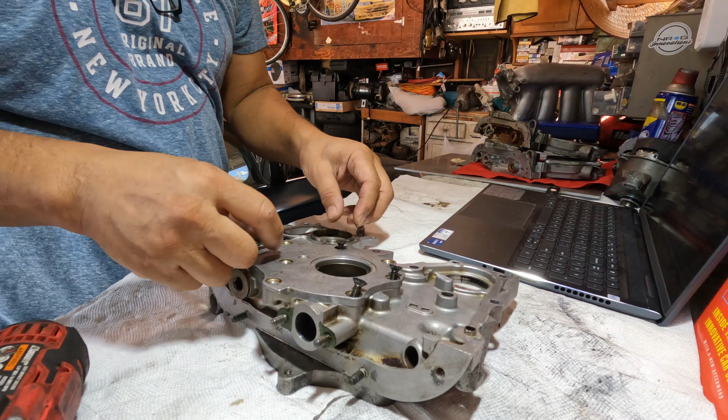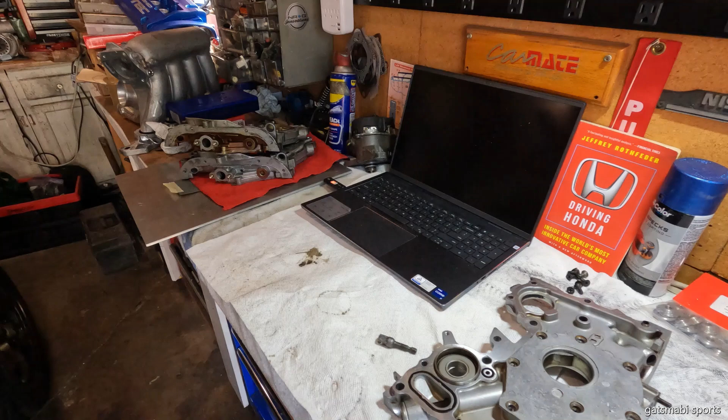I got the oil pump here that I am going to show you how to do the inspection. I have shown you how to build a stroker, or more like an H23, and I failed to show you the most important thing to check, which is the oil pump. This is more like the heart of the system.

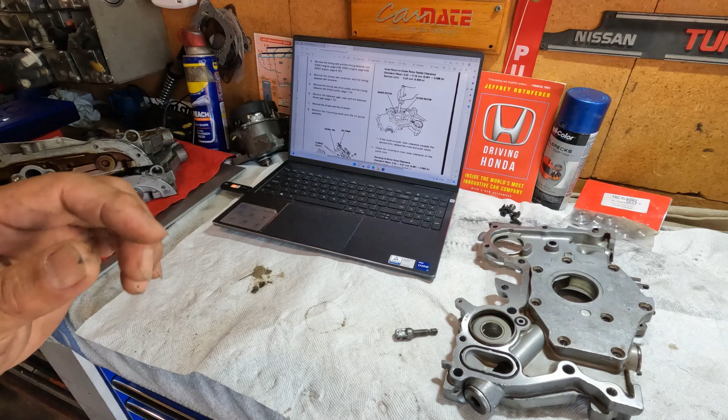Without taking the time to just remove the screws and recheck the oil pump, the gearing and all that, all of the hard work that I did on that motor will be a waste. I have worked on this motor for quite a long time, and I built a lot, and so far I have not run across an OEM oil pump that failed.

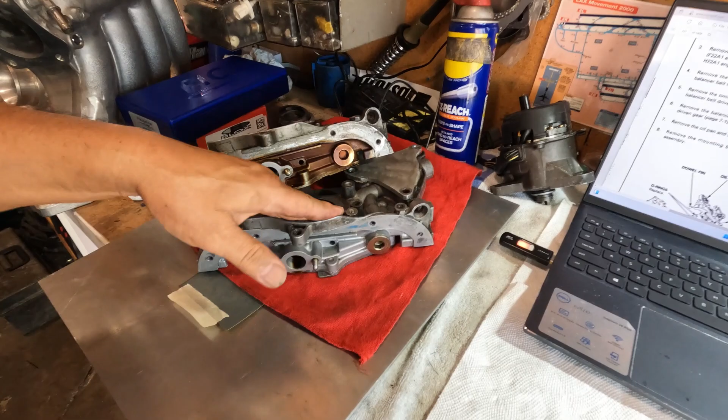This one in particular is for H22, and I have two sets here for F23, which is basically just about the same. This is the one where I deleted the balance shaft. Since I have an H22 oil pump here and I have the service manual for it, I am simply going to follow the Honda guidelines for the Prelude.

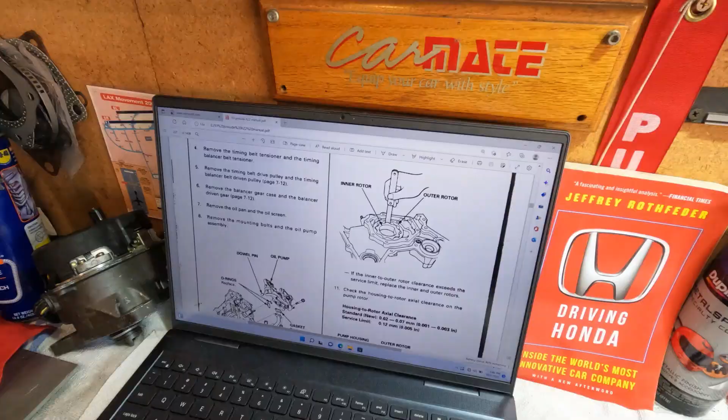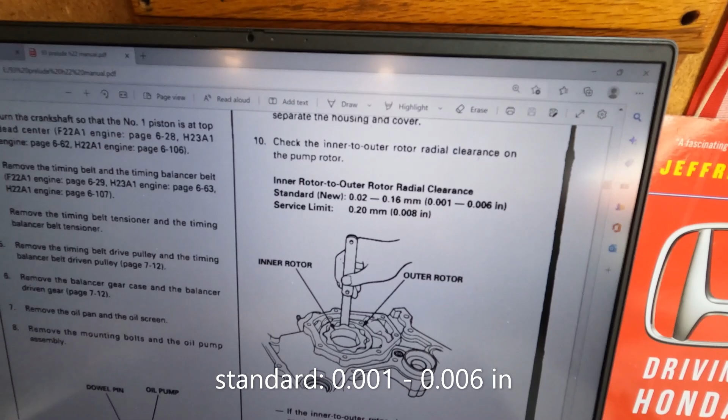So first thing we're gonna check is inner rotor to outer rotor radial clearance, right there. It shows from 1 to 6 thousandths standard. Okay, 2 thousandths. Right there. 2 thousandths barely goes in there. But it's good as long as we're not getting like 6 thousandths on there. And next

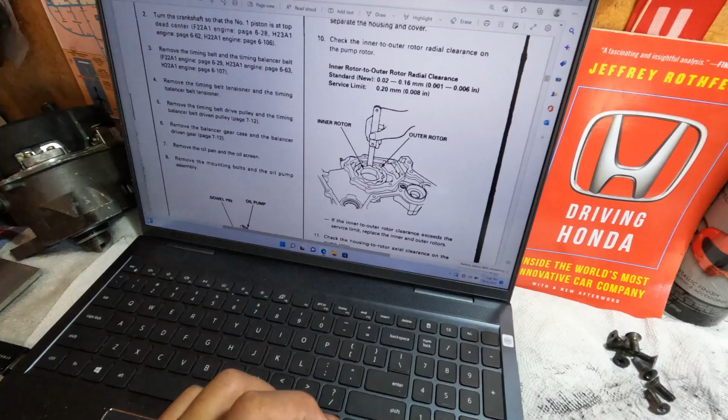is the axial rotor to housing clearance, from 1 to 3 thousandths. Just make sure that everything is clean. Put my straight bar here. I'm gonna start with 2 thousandths. Okay, 2 thousandths goes in. 3 thousandths, that's my maximum. It goes in, hardly, but it stopped. So 4 thousandths should not even go in. Yeah, it doesn't. Okay, so we're good.

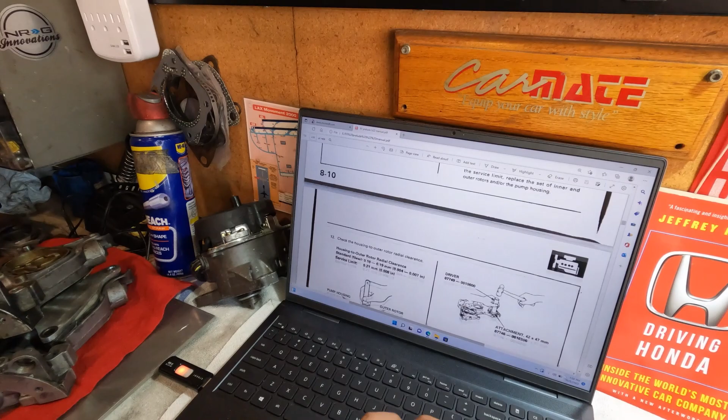And next will be the radial clearance, from the rotor to the body. That would be right there, from 4 to 7 thousandths. I got 4 thousandths here. 4 thousandths goes in. I'm gonna try the 7 thousandths. If 7 doesn't go in, I'm good. Okay, very tight. Yeah, 7 thousandths. Service limit 8 thousandths.

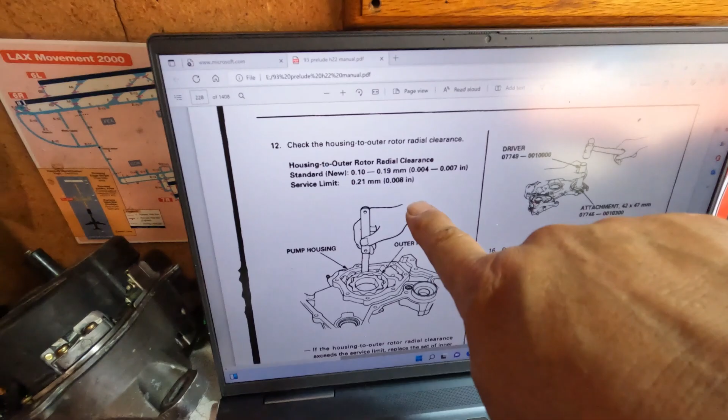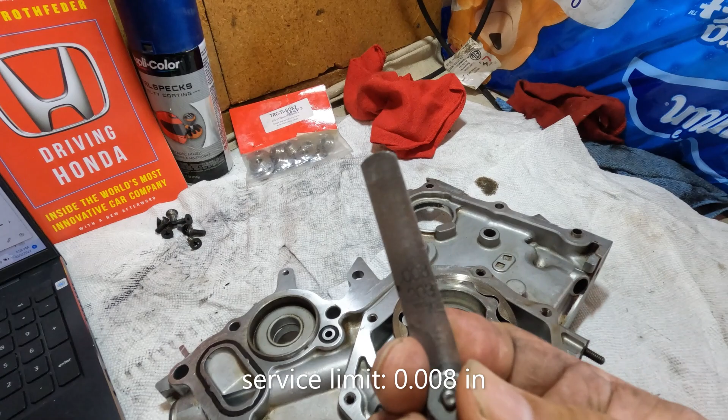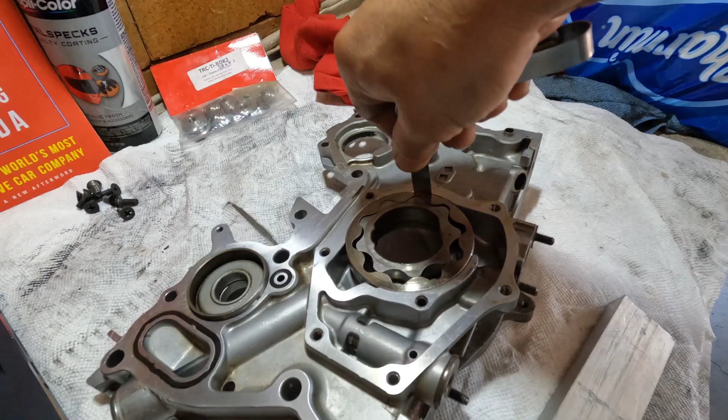Let's try 8. That's 8 thousandths right there. Very tight. This is kind of a little bit worn out, just past the service limit. 9 thousandths won't go in. So I'm still good on this one.

Next is the inspection of all the flanges, to make sure there's no sharp edges. As you can see, it has these scratches. As long as when you rub your fingernail it doesn't get caught, it's fine. And try to put it back how you got it off. If you do have some sharp edges right about in this area,

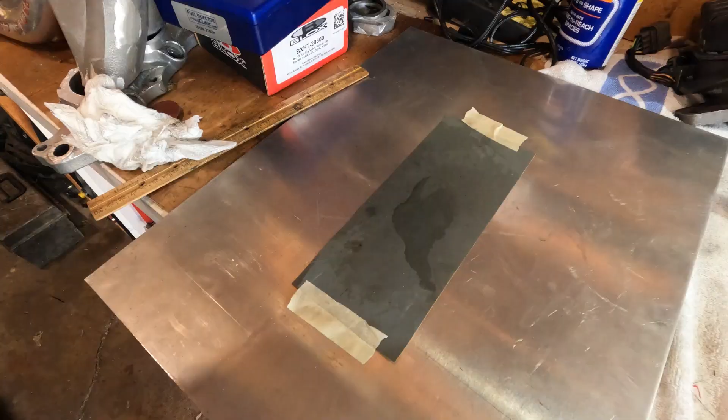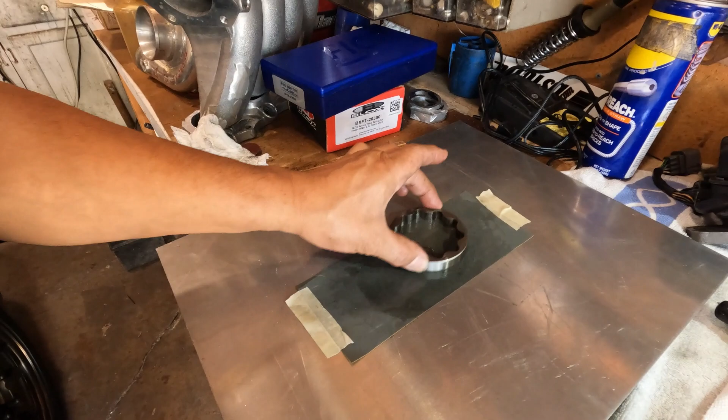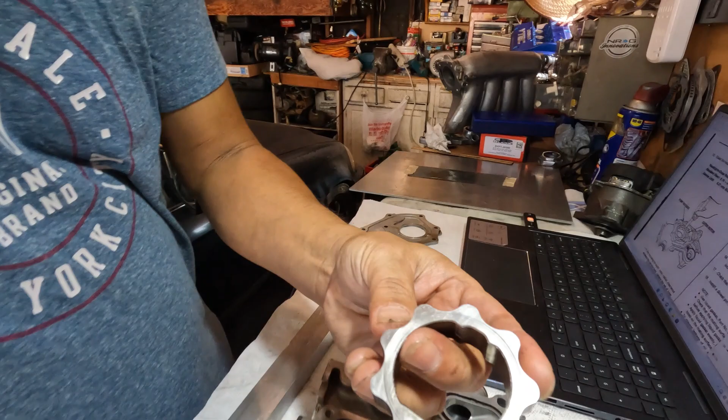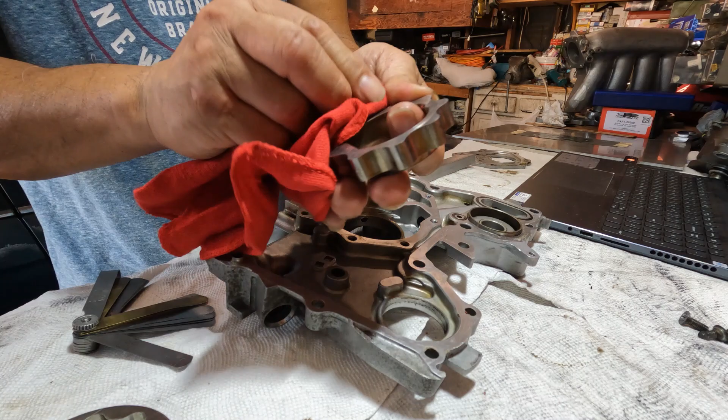what you could do, this is a 200 grit sandpaper, by the way. I just put it on any flat surface and simply rub it on there like that. Not too much, just to remove the sharp edges. Same thing on this side. Now you don't want to do it too much. And you could also check for sharp edges on this side, on the flange.

Now for the cover, you can do the same thing. Just rub your finger against it, and if you feel something, just give it a rub. Just make sure you clean it good when you put it back together. And I don't see anything abnormal on this one.

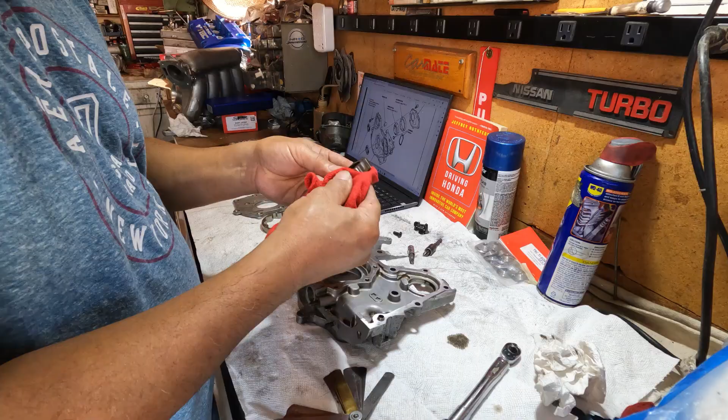So once you are satisfied with your inspection results, reassembly will be next. Just make sure everything is clean, and if you have oil, put a little bit on there and on the face of the rotor also. Basically you want everything to be well lubricated. And this is next. Just simply drop it on there. And the cover, same thing.

If you are putting a motor together, old timers pack this with Vaseline, so that when you are priming the motor, it's a lot easier to pick up the oil to send to the engine block. But since this is going into storage, I don't need to do that, but I make sure that it's well lubricated. And you simply put on all your screws.

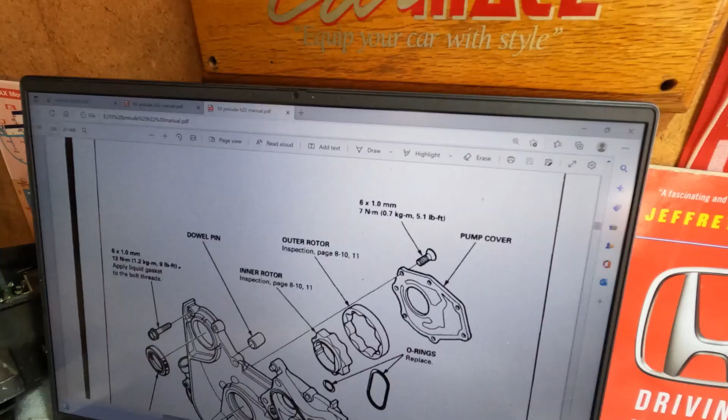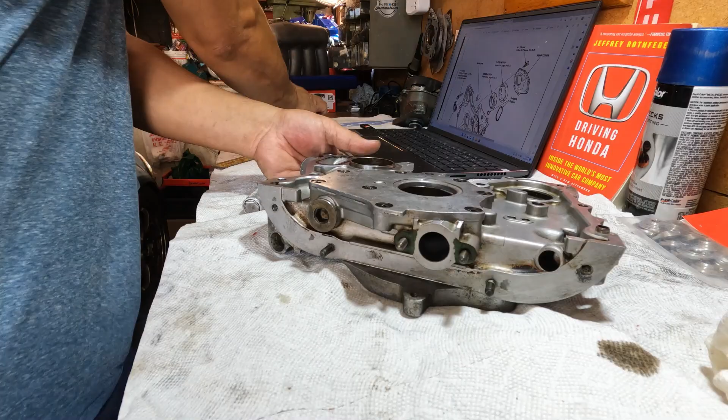And it requires 5.1 foot-pounds, which is the equivalent of 60 inch-pounds. Got the torque wrench set at 60. Got that torqued down. And you just give it a check. Make sure that it spins.

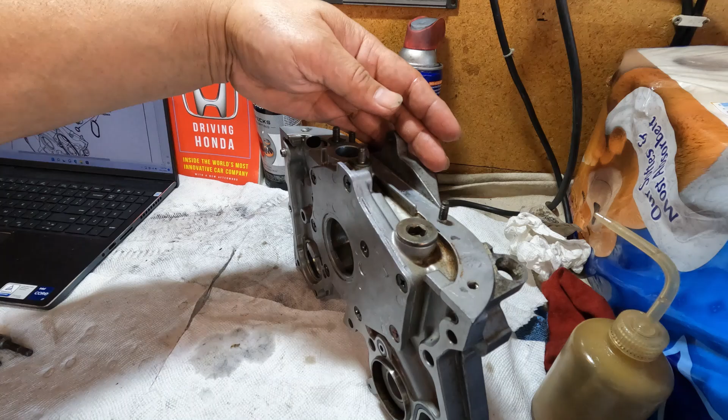Now for the pressure relief valve, which is right about this area right here. If you want to increase your oil pressure, you have to remove this cover, and some guys have been adding washers on it, but I don't really mess around with those. I don't really need my oil pressure that high. If you have to, this will be the location for it.

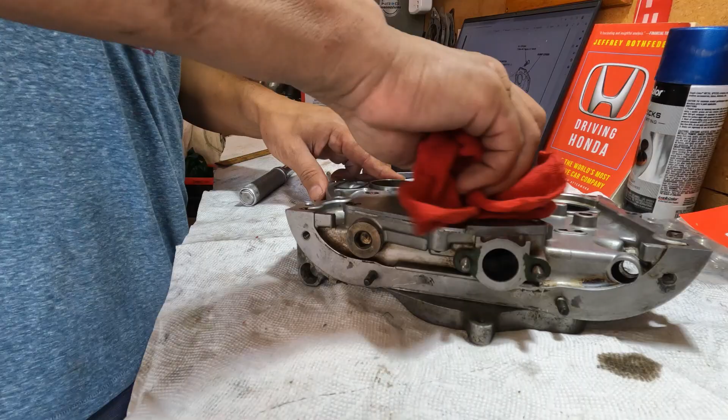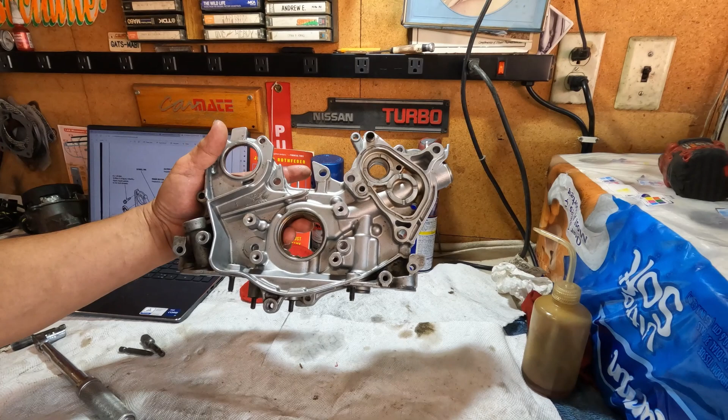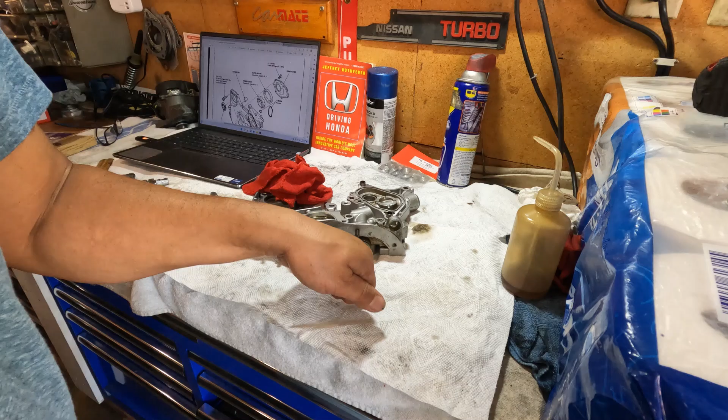What could cause your oil pump to fail? My honest opinion, vibration. One of those lightened crank pulleys will do it also. Some may get lucky and not have problems. Also, once it sucks up some debris, foreign object damage, that will do it. But I think mostly it's just the vibration. How would you like someone to keep tapping on your head for so long? Eventually you'll go crazy. Something similar like that.